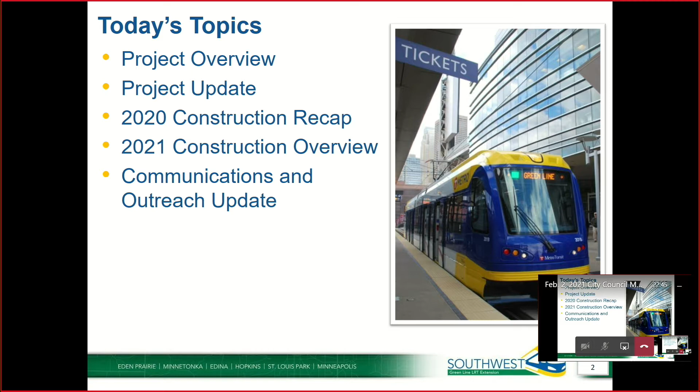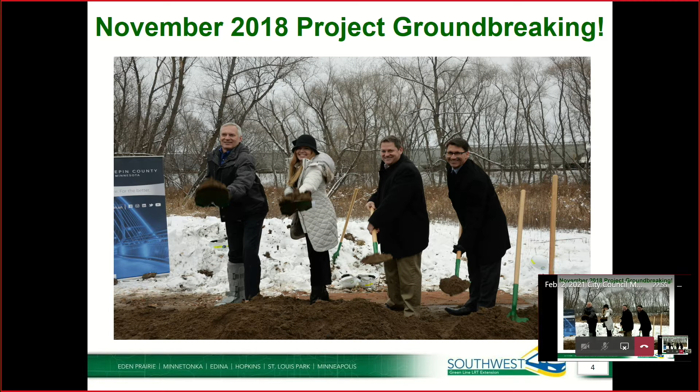So just kind of reminiscing from the distant past, familiar faces there. Back in November when we had a groundbreaking before we signed a contract with our civil contractor. Just to kind of remind you folks, we're looking to build 14.5 miles. This is an extension of our green line that runs from St. Paul into Minneapolis, and this line will, of course, come on out to Eden Prairie, ending at Southwest Station.

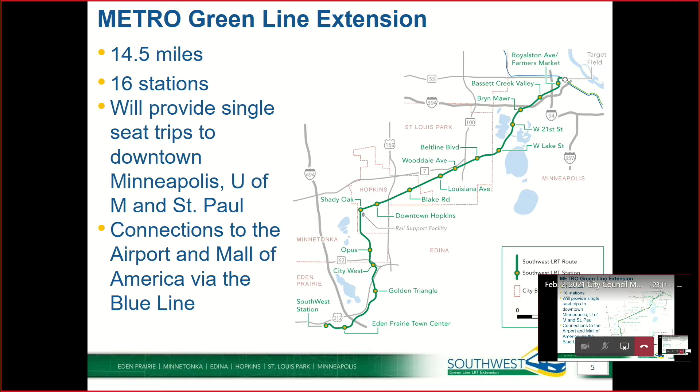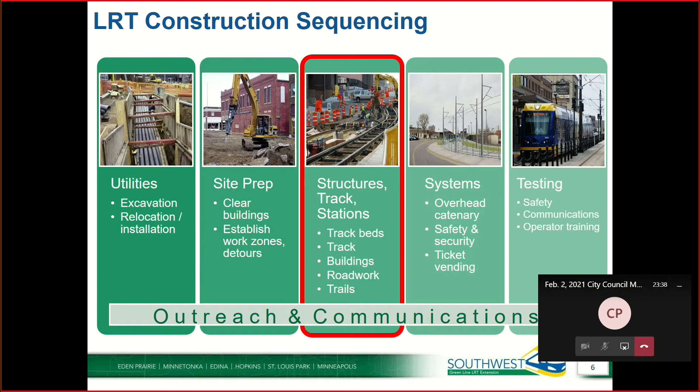So just a recap on 2020 activities. We're overall about 35% complete, probably a little bit more so in Eden Prairie.

We have a lot of bridge structure that's done in this city. I want to thank you all for accommodating us. I know it's been a disruption with all the roadway mess we've created out there. We will continue to do that, but we really appreciate the city working with us to get that work done. It's very important we have that collaboration.

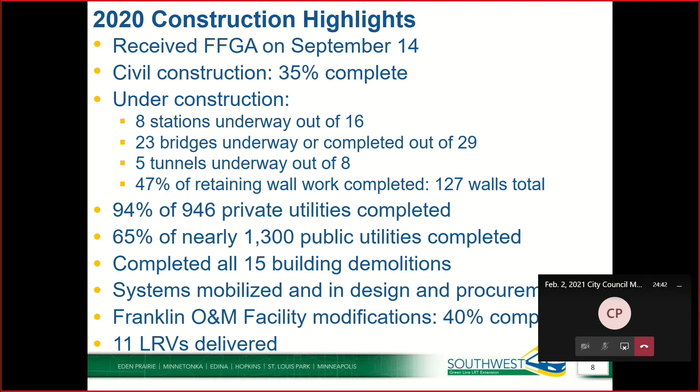So you see the stats here. We're well underway with most of the activities. One point, private utilities, 94% complete. That's a big milestone—once we get to that point, we're at nearly 1,000 conflicts resolved, so that's an important milestone. And you can see at the bottom, we have 11 light rail vehicles already delivered from California. Siemens is building those, 27 vehicles total for us.

So I wanted to take a moment, Mr. Mayor and council members, to talk about two issues. One is what's called a corridor protection wall in Minneapolis, and the second is a secant wall. I'll talk about the corridor protection wall to start.

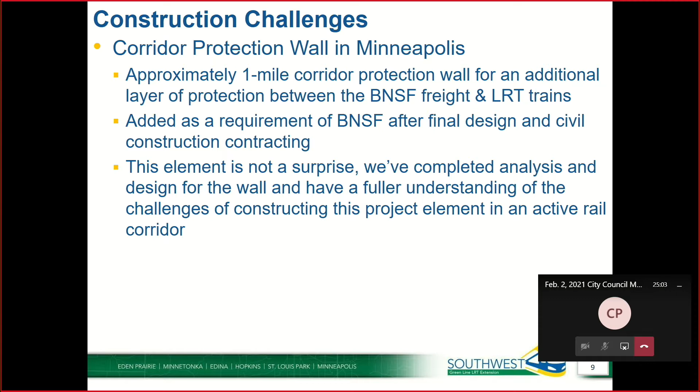It's approximately a 1-mile corridor protection wall in the eastern part of the project. I'll get to a map here. This is something we've known about as we got into our agreements with BNSF, really starting in 2016, '17, and '18. But we didn't have this incorporated into the project because we were still going through environmental review at the time we got bids.

So we went through, got the environmental review done, and we need to add this as a change order. We're seeing, as we're in negotiations with our contractor, that this may be a little more costly than we had anticipated, and we expect it quite possibly could impact our schedule. We're right in the middle of negotiations with the contractors, so I don't have any numbers to give you today in terms of where we're at.

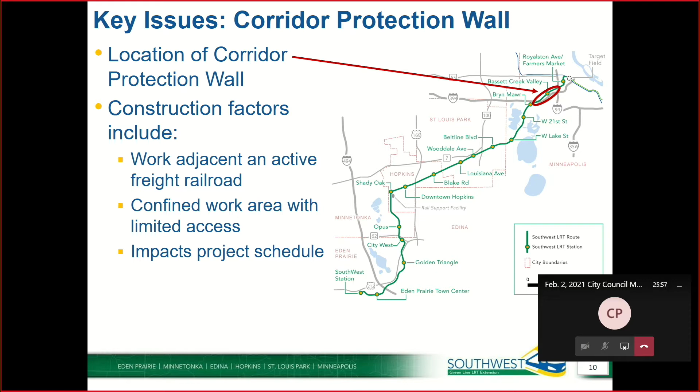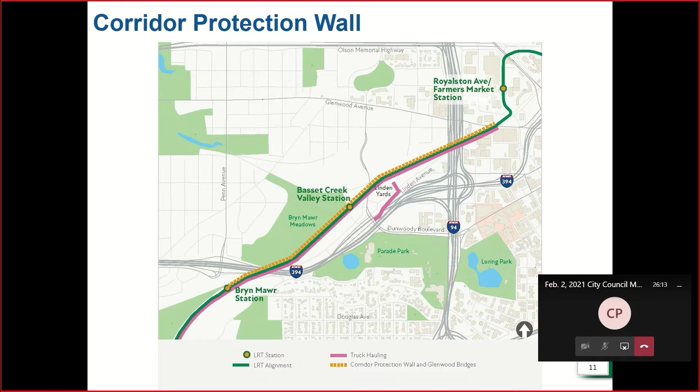But as soon as we get that sorted out, we will start talking about it publicly so everybody can understand where we are. To get a closer idea—this is the eastern end of the project in Minneapolis, starting from Bryn Mawr Station, extending just to the east of 94, so a little over a mile where we're adding corridor protection.

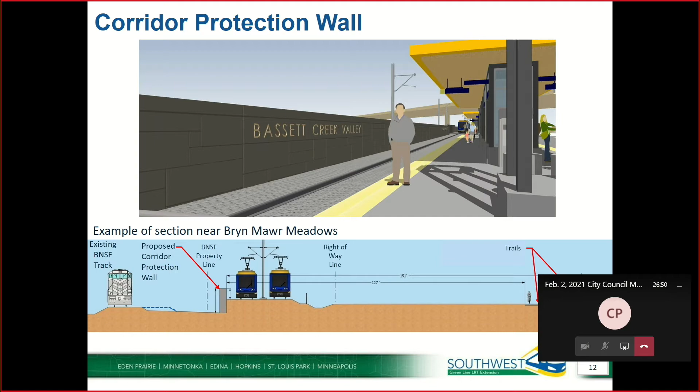Mr. Mayor? Council, anything? I just have one quick question—you said you don't know how long this is going to delay things? Mr. Mayor, council member, that is correct, we're in the process of evaluating that. We have to sort out not only how long it will take for the civil contractor to do this work, but then the systems contractor that comes on—we need to sort out how that schedule fits in as well, because they can't really start work until the civil work is completed.

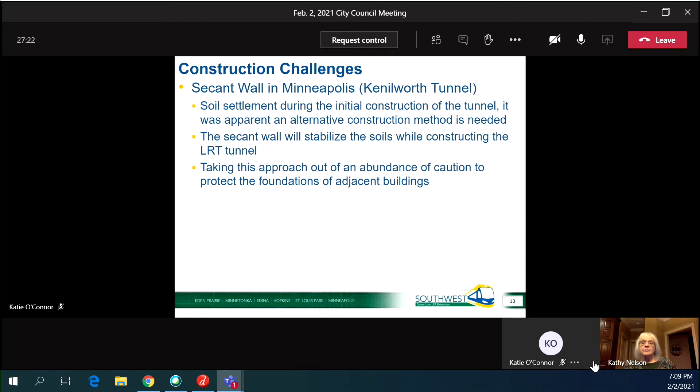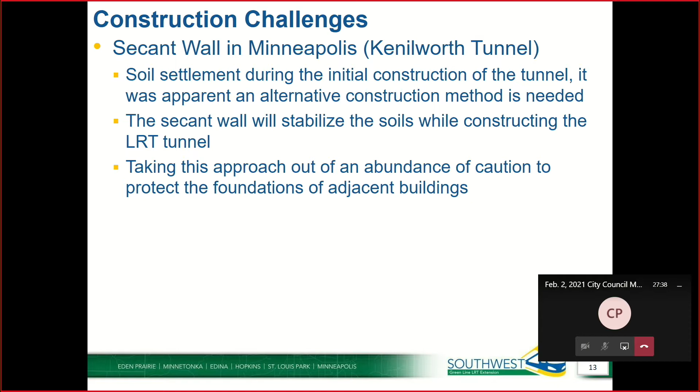And as we were putting those sheets in, we found that we had to auger in front of the sheets to get the sheets into the ground. We encountered a lot of boulders, large material, and also the density of the soil just caused that. And the result of that, it created some settlement just adjacent to the tunnel itself.

Out of abundance of caution, we didn't want to proceed with this method because we foresaw that we might see some settlement to that building or those buildings, and we felt that the buildings probably wouldn't withstand that type of ground movement. So we came up with this alternative method called the secant pile to essentially support those soils so we could prohibit that settlement from occurring.

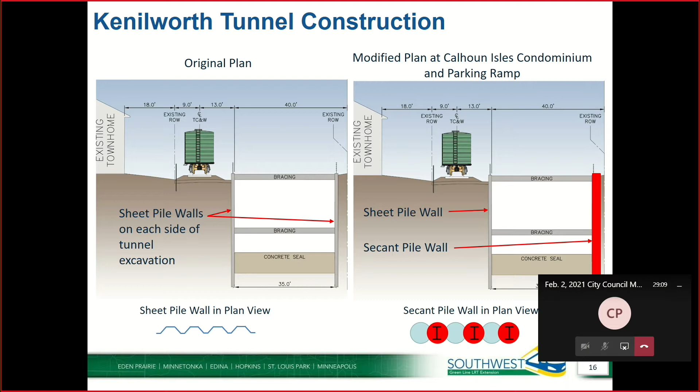So essentially we're doing a similar method here to build the tunnel, but we just have a different method of supporting the soils on the right side. It's about a 500-foot section here you can see in light blue where that is located, where the darker band there is where the tunnel is located, just south of that channel between Cedar Lake and Lake of the Isles, extending down towards West Lake Street Station.

So we are currently finishing up our design on this, and we'll be seeking a change order through the civil construction contractor to get that done. And so this is another piece that we're taking a close look at.

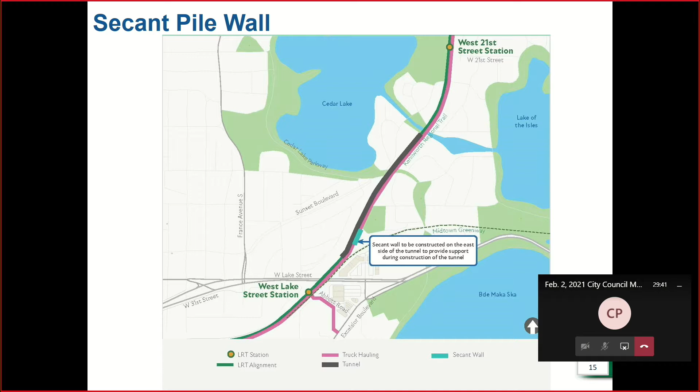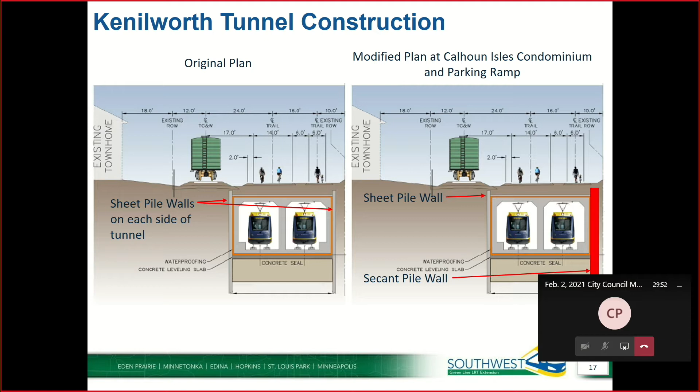With these, let me show you the last final image of what that looks like, just to exhibit that the tunnel itself really remains the same. It's just that the secant pile would be different along that 500-foot section. But what I wanted to focus here on, that's an image of what it would look like, not our project, but this is just an example off the web to see what that looks like.

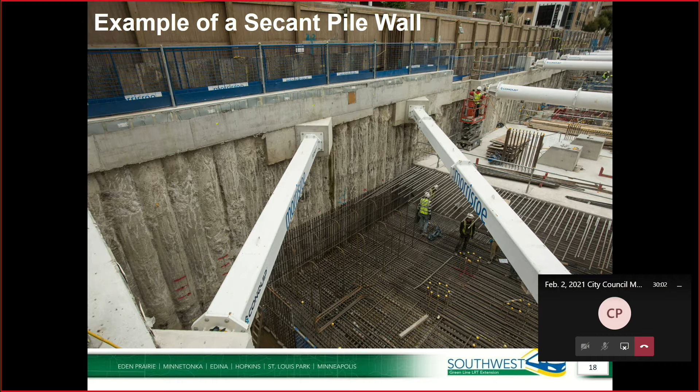But what I wanted to focus here is that both of these elements are really major projects by themselves, and we're introducing this into the project that requires the contractor to build 14.5 miles to begin with. And so this is going to have an impact to the overall schedule.

We don't know, again, what that impact is going to be, but our next steps to get there are we're going to be in the process of completing a change order for that corridor protection. And then on the secant wall, we'll be beginning negotiations with the contractor on a change order for that as well. And then we'll be looking at our schedule to see how things are impacted.

And we're looking to have ways to streamline. For example, we're trying to open up more of the Eden Prairie area, since we have a lot of bridge structures done, to get our systems contractor out in this area earlier than normally anticipated, so we can get them out in the field earlier than we had thought.

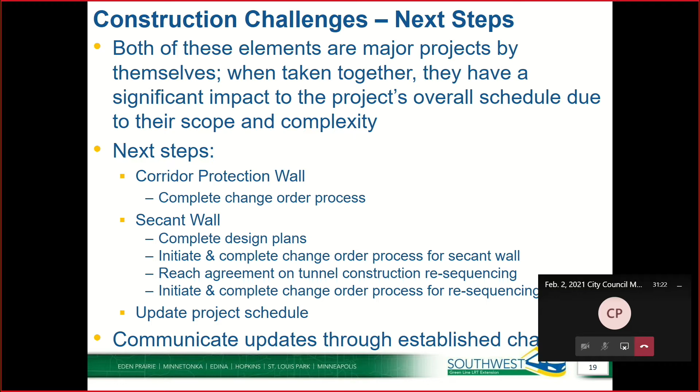So that's one mitigation measure we're trying to take a look at, see if we can pan that out. But we will communicate as we understand more about our situation, and certainly I know everybody's interested, as we are, as to when revenue service is going to be. But as we're looking at 2023, our original date, I can tell you tonight it's not going to happen in 2023, but I can't tell you beyond that until we have more understanding of our negotiations and the analysis we're going to do, or we're currently doing.

So, Mr. Mayor, I'll pause there for a moment if there are any questions. You answered mine with the dating.

Anyone else? Yes, Councilmember Toomey and then Councilmember Narayanan.

So I have a question about cost. How much more is this going to cost than the original estimate?

Mr. Mayor, council members, we don't have that number tonight. And that's something we, as part of a negotiation, will have with our contractors to sort out how much that's going to be.

And then this is just a follow-up on that. I know that you just said you don't have the number, but will that money come out of the reserve that was set aside for extra costs? I think I read somewhere that there was like 200 million put aside for extra.

All right, let's go through a 2020 recap quickly. Just wanted to show some images. This is out at Southwest Station, and there are a lot of piles. We have nearly 27 miles of piles here all told. We're about 66, almost 70% done with the piling. This is one area where there'll still be piling activity this year, possibly going into '22, but we hope the bulk of it gets done in '21.

I did talk to Mr. Simich today, just to check in. We do that periodically. He's kind of slowed down at this location due to the COVID situation, but we seem to be working pretty well together at this location.

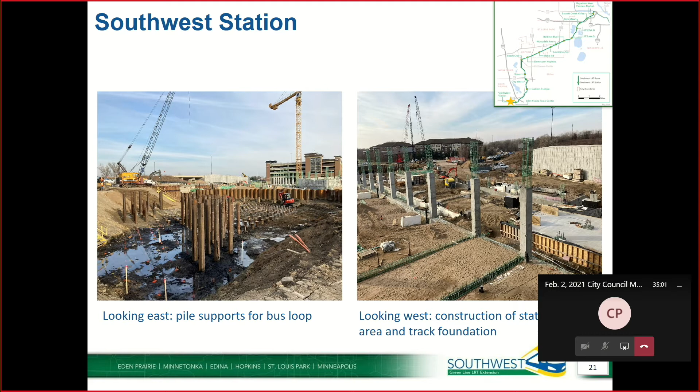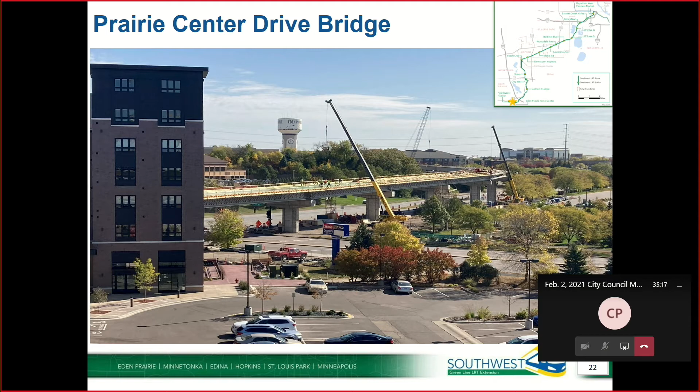Just turning around and looking east, the Prairie Center Drive Bridge - work is still underway at both this location and Southwest Station through the winter. Folks are finishing up work on the deck there, and I wanted to show off a little artwork that the city had introduced into the project.

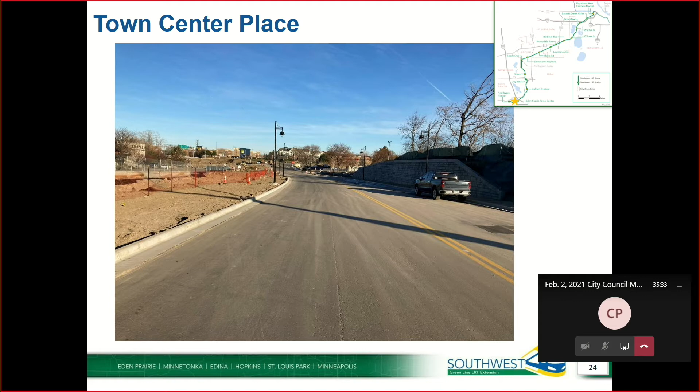Town Center Place, a lot of work done. The guideway for the light rail will be off to the left. We'll be looking to start working on that later this year. You can see a retaining wall off to the south side there, and the Eden Prairie Town Center Station is starting to take shape.

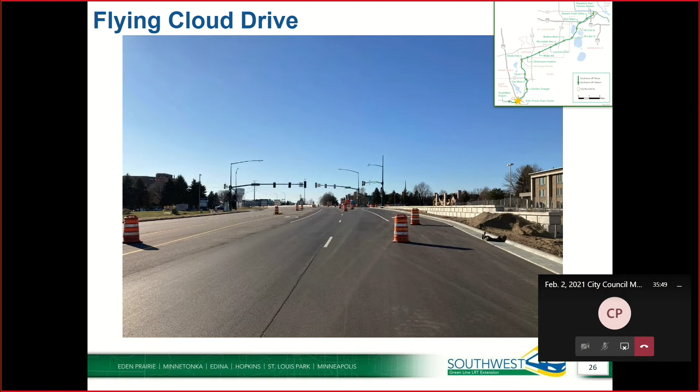Looking up, flying down south toward Flying Cloud, there are retaining walls off to the side with the hotels there. The guideway will be off to the right. And another one of our significant bridges, the LRT bridge over Valley View Road.

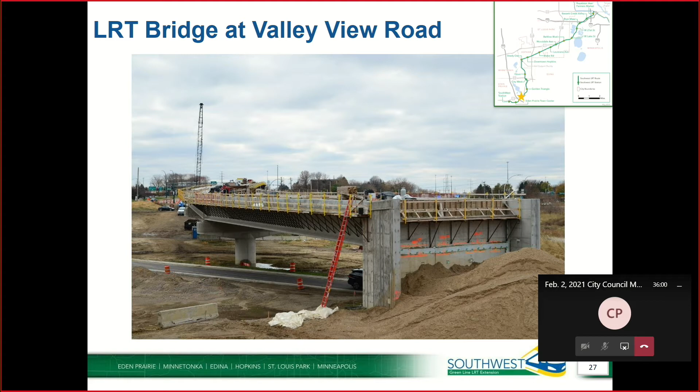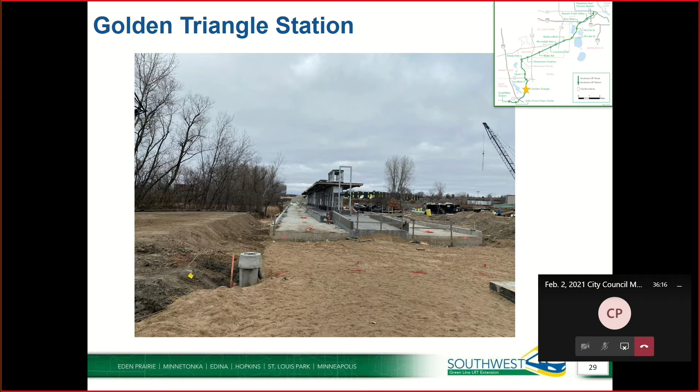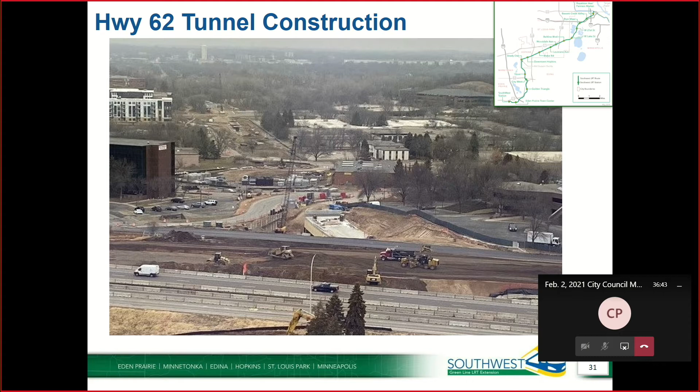And lastly, just an image of the tunnel construction. We've completed essentially the northern, or eastern, half of the tunnel, and the contractor's starting to do some work on the south side of 62 to complete that tunnel segment this year.

So in terms of construction highlights, I'll go quickly through some word slides here and get to a map, working from west to east. At Southwest Station, we'll continue with piling. As I indicated, we're 66-70% done, but we still have quite a bit more piles to go.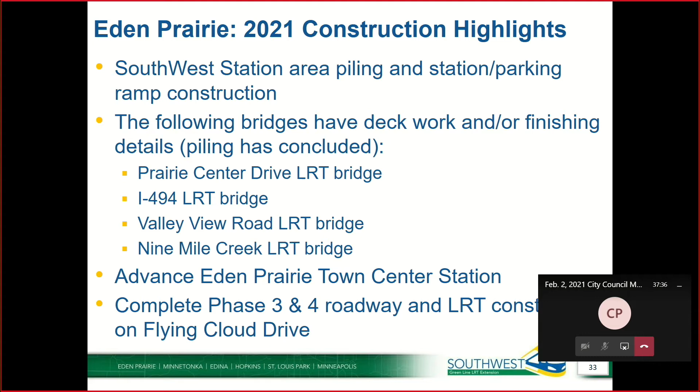The following bridges have either deck work and/or finishing details - Prairie Center Drive is well along, and the LRT bridge over 494. We'll be doing some rehab work on the surface of the roadway bridge itself, and Valley View Road is well along, as is 9 Mile. We'll also talk about the phase 3 and phase 4 work activities on Flying Cloud Drive when we get to the map.

We're continuing our work on the station at Golden Triangle and the 212 bridge, and there are a lot of retaining walls that need to be done at City West Station leading up to that tunnel portal on the south side of 62, and of course the tunnel segment itself.

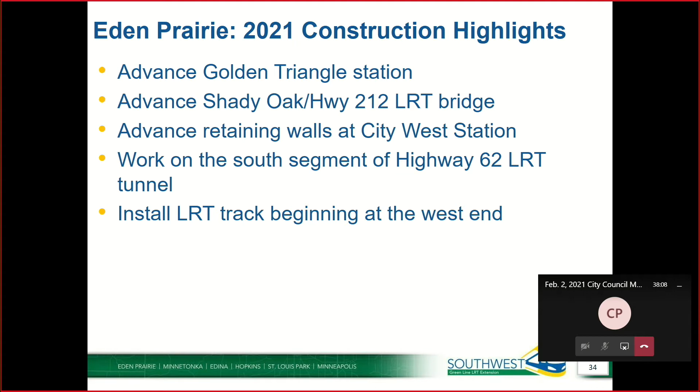We look forward to starting to put LRT track in, starting at the west end and moving east. We're getting ourselves set up for that on these major bridges we're working on right now. So here's a map we put together to talk about the construction highlights.

It's not intended to capture everything, but we wanted to point out where there's going to be pile driving activity. We'll put this map on our website and share it with the city as well. Where you see the blue diamond, that's where we anticipate more pile driving going on at Southwest Station.

Going over to Eden Prairie Town Center, there's going to be a little bit of driving activity from sheet piling, but not too extensive - nothing compared to Southwest Station - but it's for some retaining walls in that location.

Other areas of pile driving - we still have 2 piers and an abutment to do on the north end of the 212 bridge. As you get towards City West, we'll have some sheet pile work associated with some of the retaining wall work we have to do there.

We're trying our best to get word out when piling activity is going to happen. We know it's a disruption for folks. James does a pretty yeoman's effort to get the word out when things are happening, coordinating with the city. We realize it's disruptive to hear that pounding going on, and we hope to get it done as soon as we can.

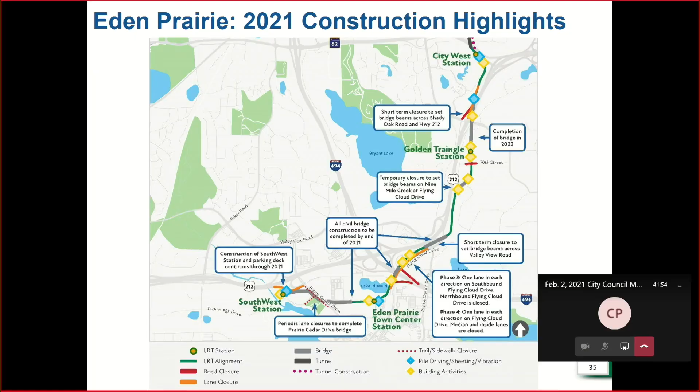Hold on that. I think that might be it for me. If there are any questions, I'd be glad to take them. Otherwise, I'll hand it over to James.

Appreciate you being here this evening. Thank you. I'd just like to add, anytime you'd like us to come down and give updates, we'd be happy to, whether your workshop or full council meeting. Great, thank you.

Good evening, Mayor, council members. I am James Mackoviak, the Outreach Coordinator for Eden Prairie. Like Jim indicated, we've got a few slides about some of the statistics and strategies we're using, best practices we've learned in the last 2 years working in Eden Prairie.

The first slide is 2020 construction communications. Our weekly construction updates have been very popular, one of the best resources for sharing corridor-wide construction work city by city, section by section. We have over 16,000 subscribers and a 46% open rate.

The 24-hour construction hotline has also been very effective. We invite people to call for really any reason. It's specifically set up for construction emergencies, but we're happy to receive non-urgent calls too, even people who just ask what the LRT is. We're very happy to hear from them and respond, usually getting back within 24 hours.

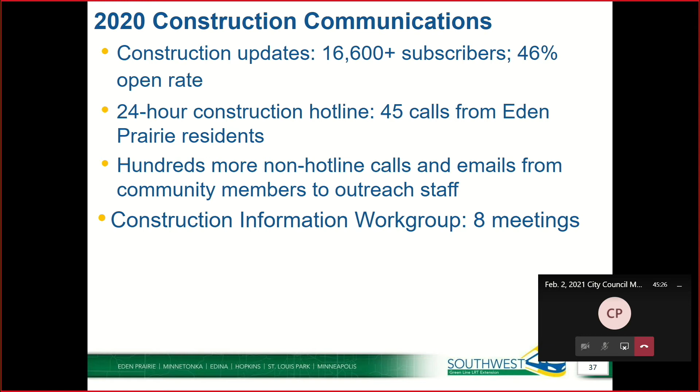2020 lessons learned: broadly communicating potential impacts, and especially staying out front of those impacts. To Jim's point earlier, a lot of construction work affects the roads and requires detours, which can get complicated and requires a lot of advance notification.

So we get out in the field, even during COVID, visiting apartment complexes and other stakeholders regularly affected by our work. In addition, we use emails, post updates online, and get information out through our construction hotline, trying to get it out in advance as effectively as we can.

Included with some of that communication are maps and other visuals of construction activities to help communicate not only what to expect, but what we're doing. People really appreciate explanations of what's going on specifically. They're hearing noise and they're saying, what is that? And why is the boom of the crane in this area? So those are all ways we try to mitigate that.

Community members appreciated targeted messages to distinct parts of the corridor. Obviously, across 14.5 miles, there's different work activities going on at different levels and locations throughout the corridor, so we try to keep messaging specific to targeted audiences.

Concerns persist about construction noise and vibration. As Jim mentioned earlier, 2020 was the heavy year for piling and disturbance, when we put up those four bridges, including the I-494 overpass. But we basically have tip to tail Southwest Station piling going on. We've done 66 to 70% of the piles there, and this year we anticipate another 10 to 15%, so it's a lot less active rate of piling. On the other side, we just have two piers and an abutment on the north side of the Shady Oak Bridge, which is probably less than 30 piles.

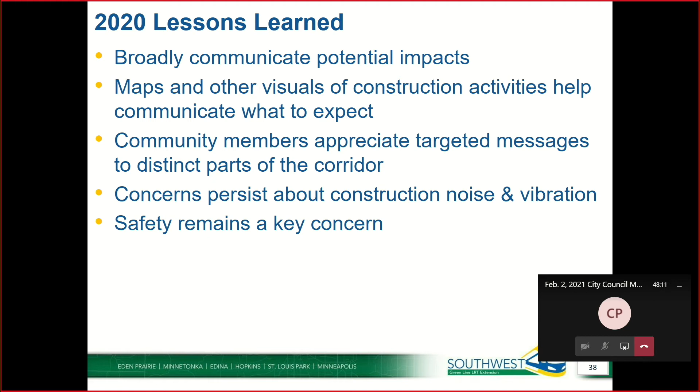And then lastly, safety remains a key concern, which is obviously a big concern for the Southwest Light Rail—staying out in front of safety concerns and being able to communicate safety messages out to the community.

Moving to the last slide, our 2021 community engagement focus. We want to create what-to-expect and site tour videos. In the next 4 to 6 weeks we'll hold a virtual town hall meeting, and for that we're working on a video—more like a 2 or 3 minute news clip—with nice moving images throughout Eden Prairie, narrated to explain the construction process and what people can expect this year.

In addition, if there's some relaxation of COVID restrictions, we expect to try to create site tours, maybe once a month in the summertime, for people who'd like to go through the corridor in Eden Prairie and get out in the field. We have vests, helmets, masks, glasses—everything people need to do that. We've got a plan to execute it; that was originally part of our outreach plan, and we'd like to revisit it if we're able to.

We will continue meeting with the construction information work groups, and return as quickly as possible to more public in-person engagement when it's possible—more group meetings where we can put up placards and meet people, and go out again to different venues, schools, and residents' homes in Eden Prairie to provide people the information they need.

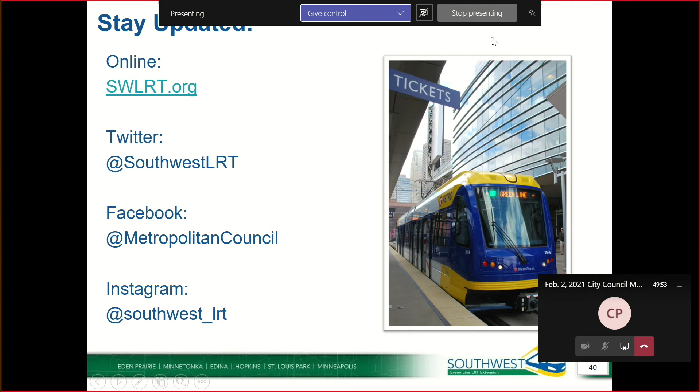And lastly, you've seen this slide before—these are the number of options for people to stay updated with us. That is the end of the presentation, so if you have any outreach or communication related questions, I'd be happy to answer them.